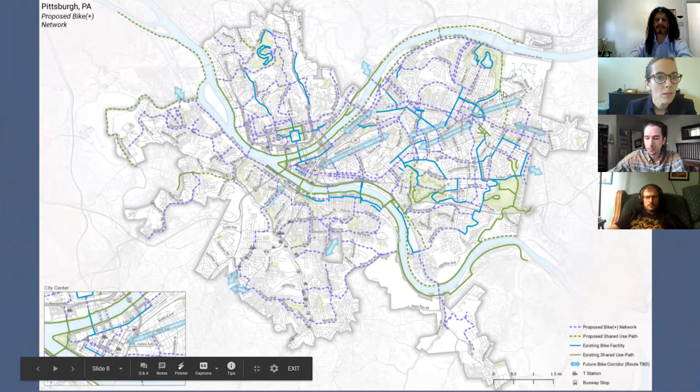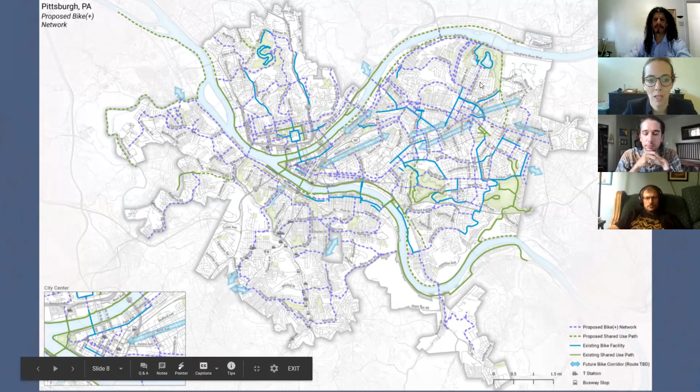This is what we hope to see for the city of Pittsburgh in the future. This is the proposed Bike Plus plan network map that shows over 120 miles of improved connections. The plan identifies where gaps are in the network and then makes recommendations for specific routes, improving connectivity, and really making sure that we are connecting to existing infrastructure. Again, this is all from recommendations from residents over a series of years that we're really investing in ways to further connect the city and improve all the options we have for mobility.

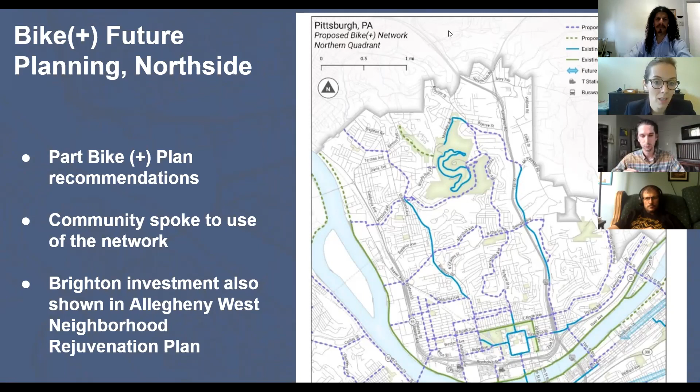Specifically for the Brighton Road project, we wanted to show this specific highlight from the Bike Plus plan. This is obviously north side and it highlights Brighton. There are recommendations and vision for Brighton. Obviously it's a 10+ year plan, but you can see there by the dotted line connecting to existing infrastructure on Brighton that there's community interest in seeing that connection fleshed out. As we move forward in our planning initiatives, that is something we are very much keeping in mind. There are also signs and mentions of investment for Brighton in the Allegheny West Neighborhood Rejuvenation Plan.

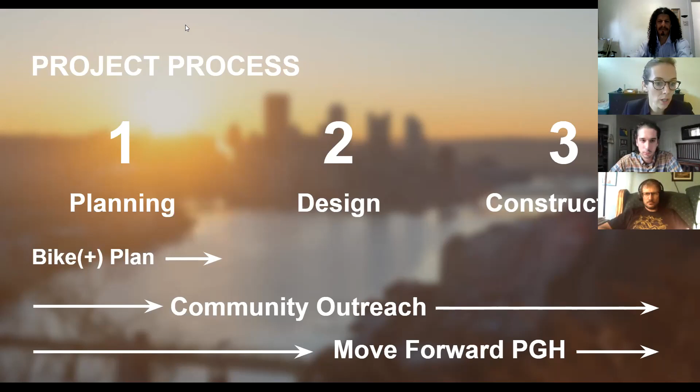All right, next slide. Sorry, I apologize, there we go. I lost track of my image here. So this is our general timeline for the Brighton Road project.

On June 9th, we had the initial presentation to the Allegheny West Civic Council. On June 23rd, we did the Brighton Road public meeting. On July 1st, we held a meeting with the Community College of Allegheny County, their Chief Facilities Officer and staff. And now we're having our second public meeting. We want to do that follow-up, share designs, continue to get feedback, and then ultimately move on to construction.

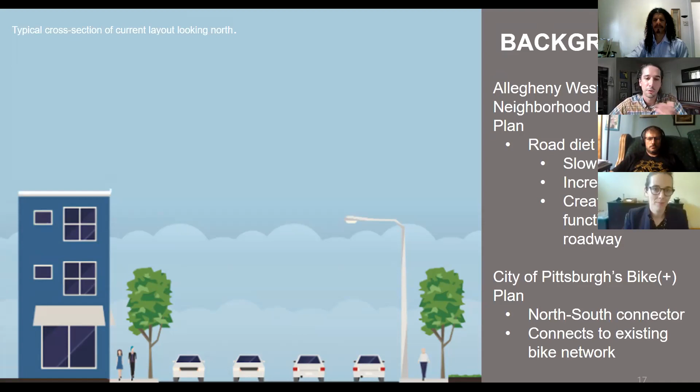This corridor was identified, as Cassandra mentioned, in the city's Bike Plus plan as a north-south connector for the bike network. We have 2 blocks of Brighton Road from Ridge Avenue to North Avenue as part of this initial phase. The depiction on the left shows a cross-section of the current layout with 2 travel lanes in each direction.

Existing conditions: currently Brighton Road is a 2-way street with parking from Ridge Avenue to Western Avenue. From Western to North, it continues to be a 2-way street, however with 2 travel lanes in each direction and no parking. The lane widths on this block are rather wide, which creates a condition known to increase speeding, and speeding in this area was identified in the neighborhood plan as well.

What we are proposing is restriping these 2 blocks of Brighton Road, reducing travel lanes from 4 to 2, as well as adding to the bike network. This project is part road diet for 1 block between North Avenue and Western Avenue. A road diet slows traffic, increases safety, and provides more room for other functions along the corridor, including adding parking between Western and North and installing bike facilities. I'll also speak to the effectiveness of road diets in the upcoming slide.

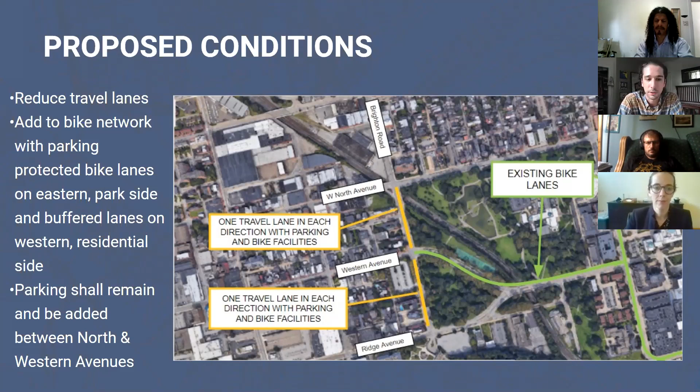On the other, opposite side of the roadway, along the western residential side, would be a buffered bike lane. As shown on the map, these bike facilities would connect to the existing bike network and build upon it. This project would provide safer bike access to the park, the business district along Western Avenue, and CCAC.

A bit of information and background about road diets. A road diet is one of our tools from our traffic calming toolkit, and as I mentioned, it essentially removes travel lanes from a roadway and utilizes the remaining space for other uses to increase safety and slow vehicular traffic. We've installed a few road diets throughout the city; one example is Broad Street in East Liberty, pictured here on the right.

This was completed in 2019 and is very similar to Brighton Road in that it was previously a 4-lane roadway, and we could reduce the travel lanes and add parking and bike lanes through the road diet.

There are 2 real metrics in measuring effectiveness of road diets: speed and crash data. As a result of the road diet along Broad Street, we saw a near 10% reduction in motorist speeding and a 5-mile-per-hour reduction in median speed.

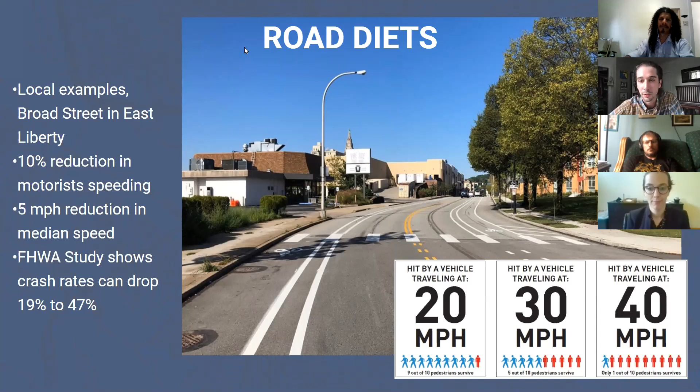While 5 miles per hour does not seem like very much of a reduction, once cars reach a certain speed, just above 20 miles per hour, they rapidly become more deadly for bicyclists and especially pedestrians. According to a AAA Safety Foundation study, a pedestrian is nearly 70% more likely to be killed if struck by a vehicle traveling at 30 miles per hour versus 25 miles per hour, and that figure can be even higher for elderly populations. So these slight reductions in speed really can be a matter of life and death.

That, among other reasons, is why road diets are an effective tool and help us reach DOMI's goal that no one dies or is seriously injured traveling on our city streets.

Regarding crash data, we don't have any for Broad Street just yet because it is so new and data is not yet available to us. But Federal Highway Administration studies show that crash reductions can be anywhere from 19 to 47% on an undivided 4-lane roadway, just like the section of Brighton Road. These vary for a number of reasons, such as length of corridor, average daily traffic, prevailing speeds, etc.

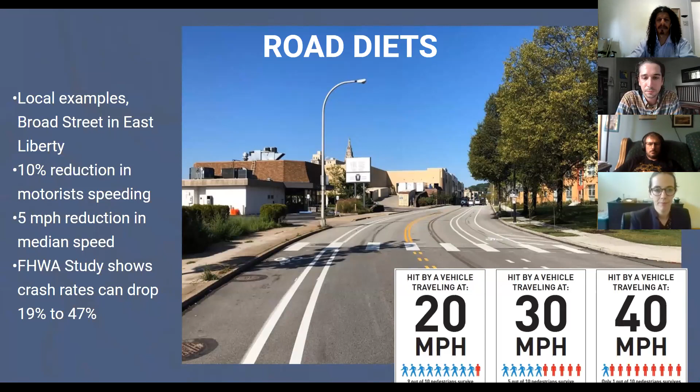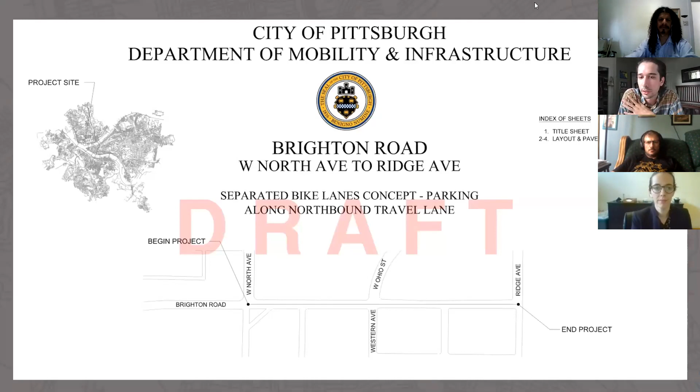So we're going to start discussing the updated layout, and I'll highlight again the differences from what was presented at the previous meeting. We've also added an aerial background to provide better context and clarity. Next slide, please.

We'll start at Brighton Road and Ridge Avenue near CCAC and then work our way north. Our updated design now shows the parking protected bike lane on the eastern park side. We came to that decision after engaging with stakeholders and hearing community feedback, and we switched the location of this facility to maintain more parking along the corridor without having to sacrifice the safety and protection of cyclists. Since there are so many adjoining streets and driveway entrances along the residential side of the street, we are able to maintain more parking overall.

The travel lane configuration, which is one lane in each direction, would remain the same as today, and a buffered bike lane would be installed on the western residential side. With this parking protected bike lane along the park side, we can maintain 12 parking spaces between Ridge and Lincoln, represented as the thick blue line there. We do plan on designating these as residential permit parking spaces.

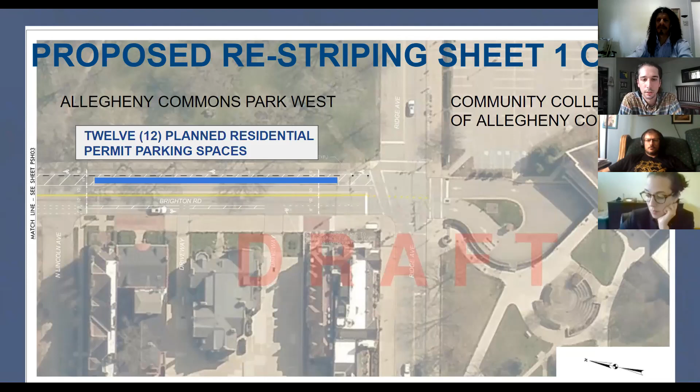Another design change, thanks to community feedback from the last meeting and some of the surveys submitted: our plan now includes several bike boxes to facilitate left-hand turns to and from bike lanes at the West Ohio Street intersection. After crossing through this signalized intersection, this is where the road diet begins. The travel lanes are reduced to one lane in each direction to slow traffic, increase safety, and return this block to a more residential neighborhood street that it can and really should be.

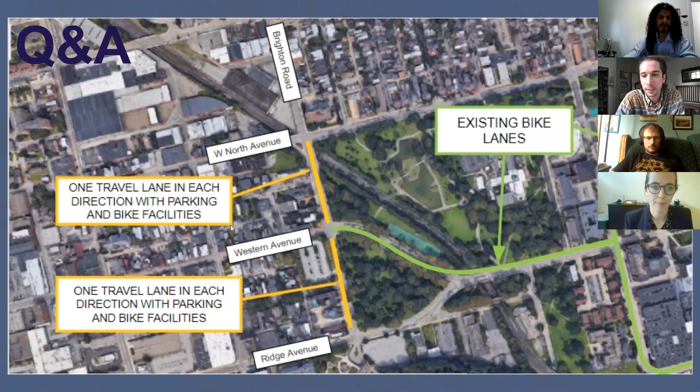With this current plan, we don't have any upgrades to the signals themselves. We can easily change timings just through computer programming, but I don't recall if there are pedestrian signal heads at this intersection. I don't think there are, because it's one of the older ones. I also believe this might be a capital budget request to upgrade this signal, but the budget is still being ironed out, so I'm not sure if we will have the resources to upgrade that signal.

But we are exploring the idea of at least updating the crosswalks themselves, the painted crosswalks. Instead of having parallel lines, they would be updated to the piano key style or zebra style, as some folks call them. They're high visibility and make for a better pedestrian experience, and help visually impaired people cross easier as well.

Maybe you can add how the road diet will also help pedestrians?

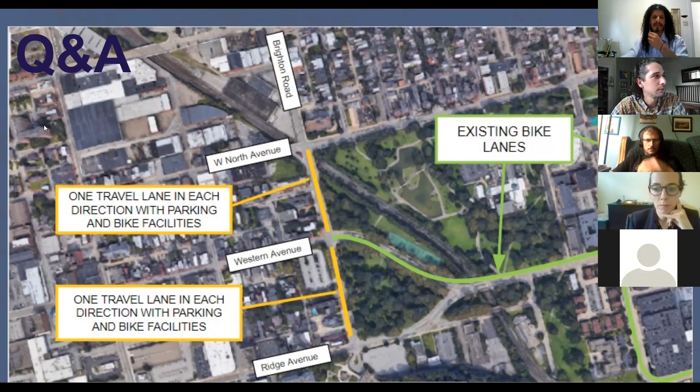And then to answer the question about residential parking—Ricardo, is there any way we could go back in the presentation to when we stopped? I don't think you can ask them to survey, because then they just send a piece of paper.

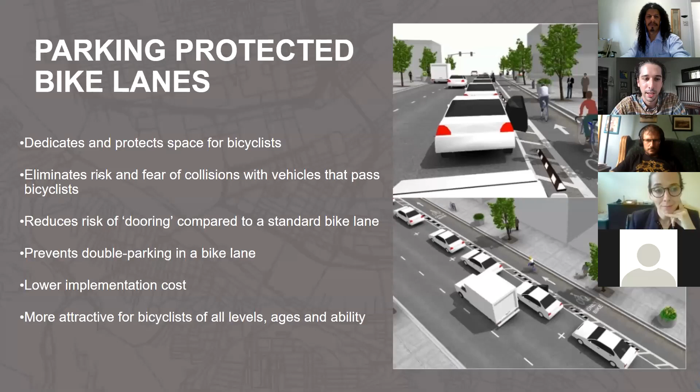How far do you want to go back? Keep going. Yeah, oh too far. Could you go back there? Do we have more metered or unmetered than metered? We need residential permit parking the most, in my opinion. Oh, they're allowing somebody to talk.

So currently, right now, there are actually 7 residential permit parking spots along the section of Brighton, and we are actually increasing the amount to 12. So we are providing additional residential permit parking spaces.

And I understand, but there's still more metered than unmetered, correct? That is correct, yes. Okay, so couldn't it be even, since there are more metered than residential permit, because that's what we need more of in the neighborhood? And we're getting impacted here by this. This will be something we have to work through.

And this would be a plus then that would help the residents here, because I think it's going to be a lot of backed up traffic. It's going to be hard for us to pull out onto Brighton to do errands, and hard to even walk because there's going to be so many cars backed up—this has happened before with traffic trying to get from Western Avenue to North Avenue.

My name's Mary. I also made a comment that if you turn that into a stop sign instead of a stop light, people could continue to stop and go. Plus that right-hand turn from West North Avenue onto Brighton—people don't stop there at all, they just merge in. That should be eliminated and made a stop sign so cars have to stop. That's my thinking.

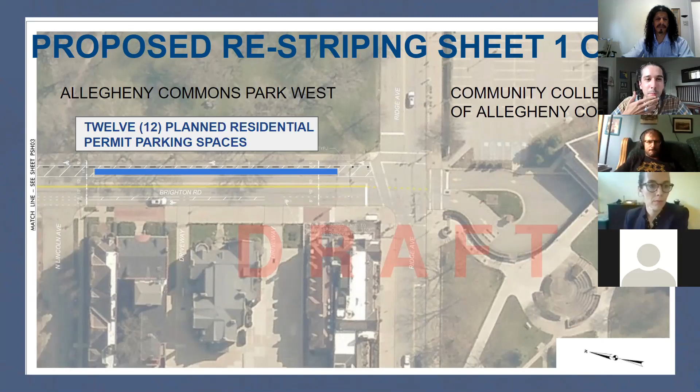I can also add that the sight lines, the sight distances are not ideal due to the bridge, which is a concern on an ADA level and for anybody trying to be seen safely. So that also ties into part of the reasoning there.

Okay, I'll ask another one. This is from Mary. Have you looked at the flow of traffic at Brighton and North, which will funnel cars west on North to get to Route 65? North Avenue is the main artery through the north side, volume-wise, and that's how it acts and how it should be. Part of this plan, with the road diet, is to eliminate any unnecessary travel through the corridor. This is a residential street, it is zoned residential and should look and act like one. We're trying to return it to the residents and make it a safe place for all users.

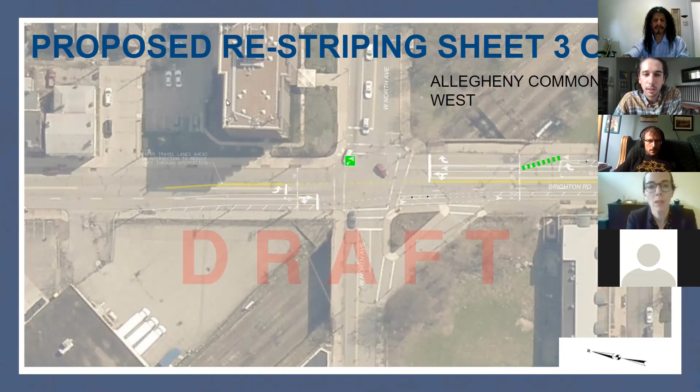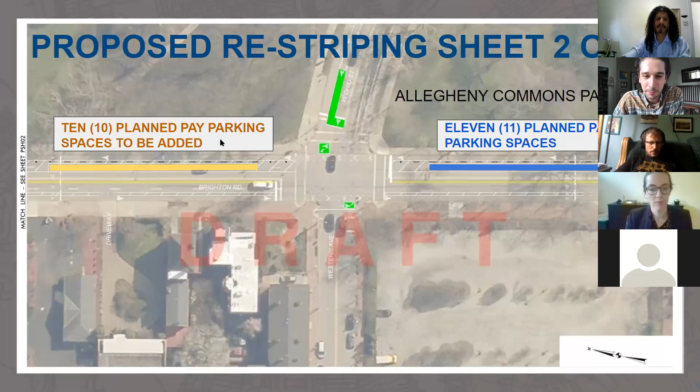How do you slow down the left turn from Western onto Brighton? Cars traveling from Western to Brighton typically ignore pedestrian or bike crossings from Brighton to the Commons. Our intent, not shown on the drawing yet, is to improve these crosswalks to high visibility crosswalks so motorists realize this is a pedestrian crossing, and it is law for them to yield to a pedestrian in a crosswalk. Motorists need to follow the law.

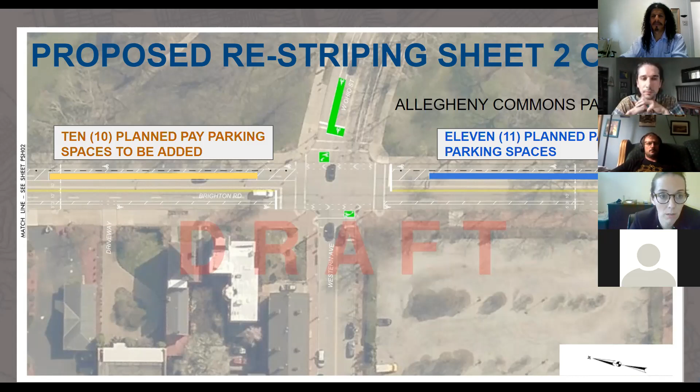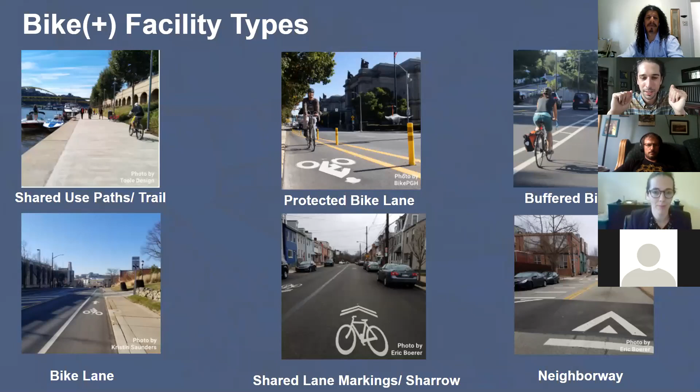Ricardo, can you go back to the slide that shows all the different types for the Bike Plus plan? Right there, thank you. So these are the different types of facilities, and they range from a fully shared use path to just a shared travel lane between bikes and cars. So just because there's a line on the map doesn't mean it's all going to have dedicated bike lanes. It could be a shared scenario.

But if it's shared or dedicated, regardless, there's still an issue with on-street parking for residents on that section of West North, right? If it's shared, would I get a ticket if I park in a bike lane? If it's a shared scenario with sharrows, there is no legal parking removal for those types of facilities at all. Correct, right. All right, we're running out of time.